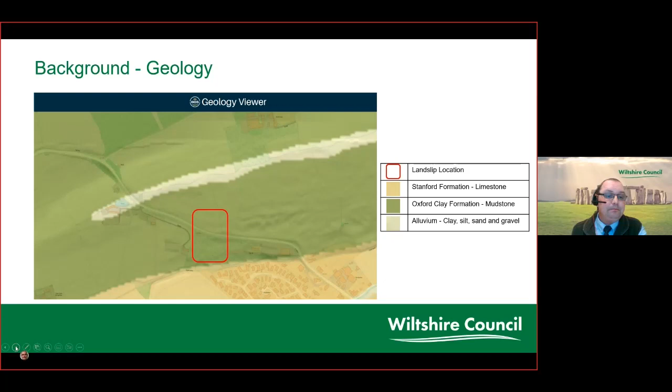An image just to show the current situation. This is the B road coming from Dauntsey Lock to the left down to Lyneham to the right, and just so people can orientate themselves, this is the Motorholics site. The landslide itself is within, or approximately within, this red circular area, about 100 metres in diameter, so that is a significant area.

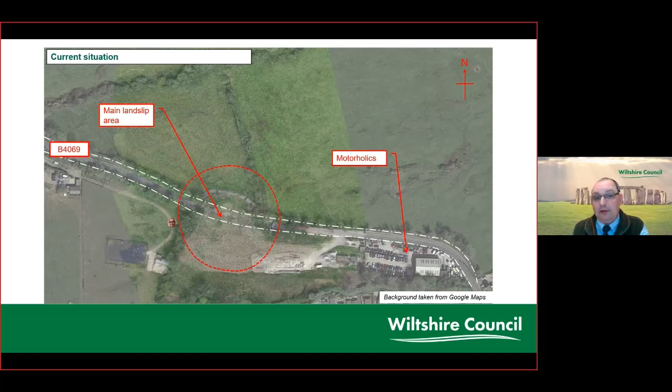The block of land, or the landslide material that's moved, we believe is between 2 and 4 metres deep, so it's a significant amount of material that has come down the hillside. The white dotted lines on this image are important because they indicate the highway boundary. That means the area of land between the white dotted lines is the area that Wiltshire, as highway authority, controls and has access to. But the landslide clearly is not contained wholly within the highway — it covers significant parts of privately owned land either side.

I mentioned earlier that there is recent evidence that the land is still mobile in that area. In January of this year, we were alerted to a totally separate incident at the rear of the Motorholics site, where you can see part of the hillside has been displaced — about 0.5 metre or so drop in elevation. Although this is totally unrelated to the main landslide event from February last year, it does indicate that the area is very susceptible to land movements.

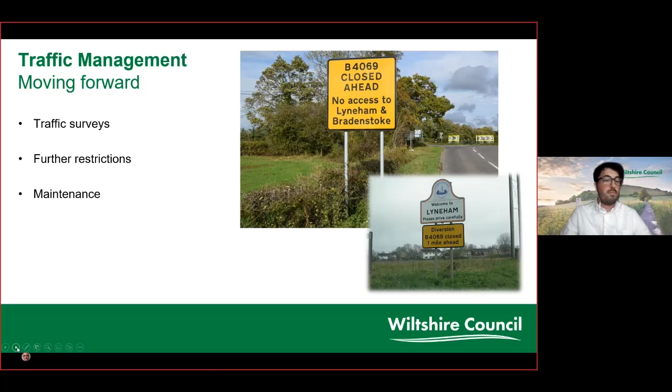Thank you, Jack. I think that was quite helpful, and the big take for me there is that we haven't simply just put some signage up and then walked away from the situation. We've actually been reacting and changing the situation as best we can as the time has passed. So yeah, a lot of activity and a lot of work behind the scenes in terms of our traffic management arrangements for the scheme.

I think we're now going to come on, Chris, to the ground investigations. You've got a few slides which talk about the ground investigations we were able to do towards the latter part of last year.

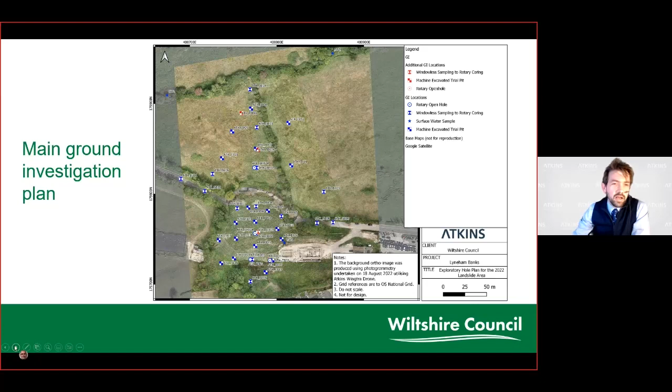Also during the closure of the road, the opportunity was taken to install ground investigation and monitoring equipment in the area to the west of the landslip, where there's been historical cracking and pavement issues patch-repaired in places. This was done so that following the reopening of the road, Wiltshire can monitor these areas more closely.

In addition, to the east of the landslip, recently there's been water discharging onto the carriageway. There have been investigations looking at the potential source of that water, and these will allow the design of remedial solutions to fix this problem along with the landslip.

This next slide is an observational ground model, developed on the basis of the ground investigation information and everything obtained during the desk study. There are a number of key features to draw out from this. This is a slice through the ground, taken through the centre of the main landslip.

On the left-hand side, orientated to the south of the site, you can see the limestone at the top of the slope, as discussed earlier when we looked at the geology of the area. That limestone overlies the Oxford clay, shown in green, and the slope itself is overlain by weathered Oxford clay, where material has been subject to historical weathering. Above the weathered Oxford clay we have a mixture of fill and solifluction deposits.

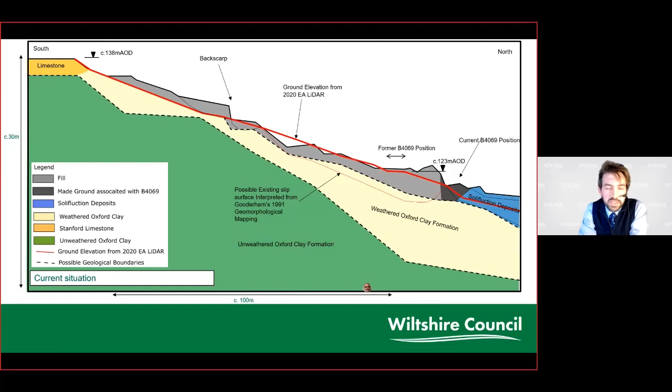The final thing to highlight on this slide is the small dashed red line, indicating an existing slip surface inferred from historical geomorphological mapping. This area and its geology is particularly prone to landslides, and mapping dated from 1991, done as a study for Wiltshire at that time, indicated potential evidence of geomorphological features suggesting a historical landslide. There's also evidence within the topography and contours that the landslide area was previously in a local depression, which again might indicate historical landslide activity.

So obviously it's absolutely critical in order to fix this problem and to reopen the road that we understand the key factors affecting the landslide. To provide a suitable remediation solution, it's critical that it addresses all the underlying causes.

A couple of points to draw out on that. The geology of the site is prone to landslides and ground movements. We've got shallow groundwater migrating from high areas to low areas, which can exacerbate issues. There's historical ground movement, both in recent history and longer term, going back to the glacial periods. Weather is very important too - increased and excessive rainfall, particularly during the wetter months, can accelerate ground movements and lead to instability. Finally, changes in topography or loading on the hill slope can significantly impact slope stability.

On the basis of all of this, it's clear there's potential that some of these aspects triggered the landslip in 2022. The location of the landslip in areas of historical slip surfaces, potential local changes in groundwater, as well as changes to the loading on the slope and the addition of fill, is likely to have contributed to the triggering of this landslide.

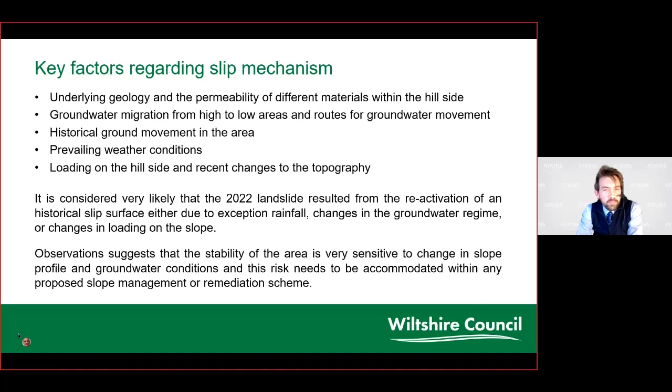Thank you, Chris. I think that's very helpful. And for me, the wording in that final paragraph on the slide is crucial. The ground investigation works that have been undertaken have drawn us to the conclusion that we have a very sensitive area here with regards to the stability of the hillside.

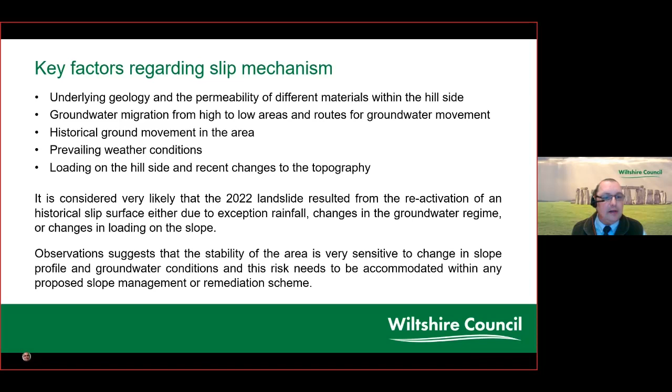Fundamentally, if we were to try and come up with a solution that just involved going in and building a road, without being mindful of and trying to provide additional stability to the hillside, we wouldn't actually be solving the fundamental problem. The ground investigation works have given us a lot of data and information, which has fed into our ability to start thinking about what the solutions for the site might be.

That brings us on to the next section of our presentation, which is all about developing those thoughts for what a scheme may look like.

But what we must do is ensure that whatever we choose for zone B, as an example for the road, is compatible with and works alongside the solution we put in for zone A and zone C. If we don't get all the areas working together as pieces of a jigsaw, we could end up with a situation where the overall solution isn't actually achieved.

Not only have we got three different zones on the slip itself, as Chris was alluding to earlier, we also see some signs of carriageway problems to the west and to the east of this site. So we've actually got five different areas we need to think about, and in determining a solution, we need to develop a comprehensive solution, which by its very nature will end up being quite complex.

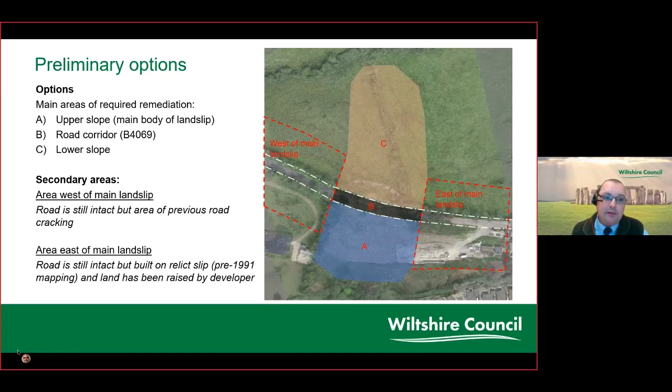So, Chris, I think you're going to now move on to talk about the options development work we've been undertaking, specifically thinking about the core works that have to happen regardless, and then the potential options beyond that. Yeah, thanks, Steve.

As Steve mentioned, we've been working closely with Wiltshire over the last few months. Sorry, do you mind just going back one slide? Basically, with a completely blank slate at the start, looking at remedial solutions, and then gradually over a period we've narrowed that down. What we've developed is effectively a two-phased approach - there are what we're terming core works, which would underpin all of the different options we've considered, so common elements.

Going back to the failure mechanisms of the landslip itself, obviously all the remedial works are targeted at trying to address some of the potential underlying causes. Firstly, changes to the slope topography - post 2021, material has been deposited on the upper slope.

So we have this core earthworks which would seek to remove that material and re-establish elevation of the slope back to its pre-2021 levels. That would underpin all the remedial options you'll see on the slides ahead. In addition to the core earthworks, there are core drainage works.

Groundwater is absolutely critical in driving slope instability, so controlling it is critical to reduce the risk of future landslides and slope instability. What you see on this slide is some extensive drainage proposals to manage groundwater throughout the upper slope.

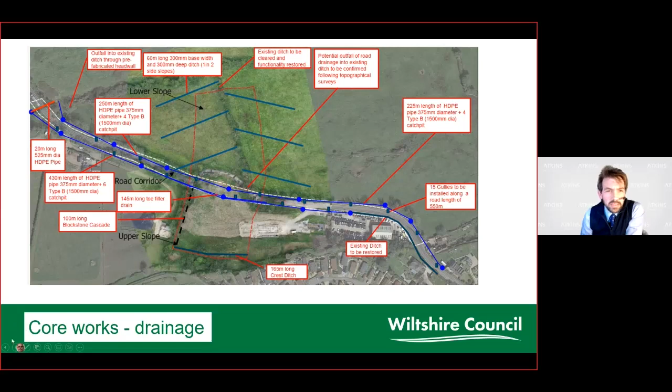As I said, those core works underpin all three of the options that we've looked at and assessed. We've developed a number of options which we can then undertake an assessment process on, which Steve will come on to later. They've been developed in enough detail to understand the relative advantages and disadvantages of each scheme, so there's both a plan and a section for each of the three options. I won't go into a huge amount of detail, but just to give a flavour of the three we've looked at as part of our options assessment process. In the top right hand corner you'll see the estimated construction costs for each option.

Option one was excavate and replace. Very simply speaking, this is a case of excavating the failed landslip material, removing it from site, and then importing engineered fill, compacting that in layers to establish a suitable platform on which to rebuild the road. That includes additional drainage measures to control any water that would find its way into this area.

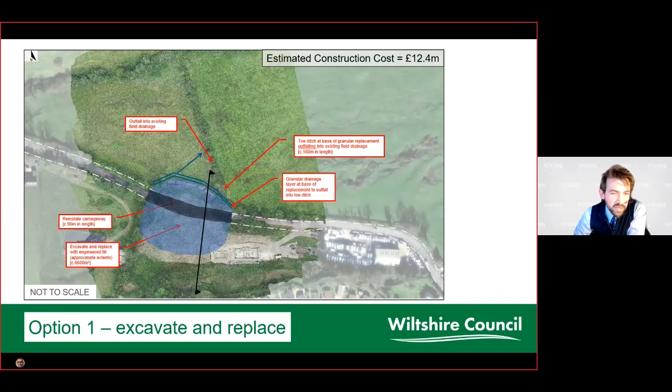You can see that the road itself forms a very small part of the overall remediation required, and given the position of the road, you can see how extensive the required remediation solution is, both in the area upslope of the road and also downslope, which is currently private land and outside of Wiltshire's direct control. Next slide, please.

So the second option we've looked at is a soil stabilisation option. This has some additional drainage in the upper slope to try again to provide further controls on groundwater above the landslipped area, and then the main remediation part of this solution is mixing in a cement binder into the material on site as it is at the moment. That cement binder strengthens and improves the properties of the ground that's currently on site.

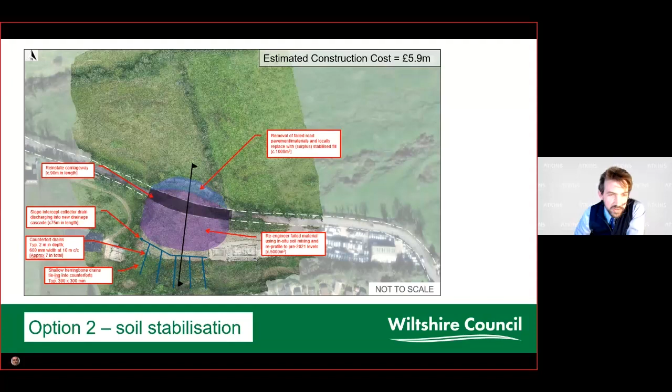And then obviously some additional works associated with that as well. The final option is a piled retaining wall solution. This involves installing a contiguous bored pile retaining wall on the downslope side of the carriageway, which stabilizes both the road and the slope itself.

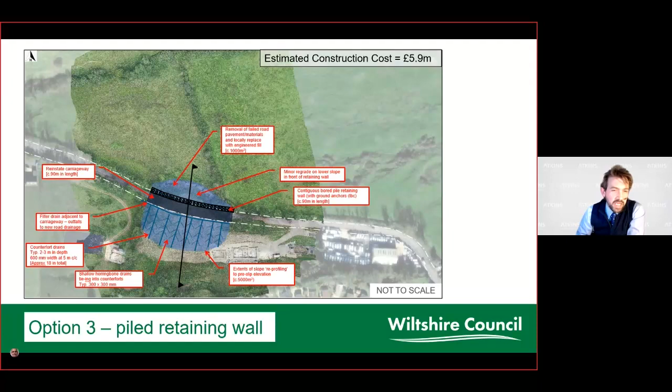In conjunction with that, some counterfort drains are proposed in the slope directly above the road. These counterforts serve two functions: they improve drainage in the slope itself, as well as improving the strength of the ground. Effectively, it's a dig and replace, but on a more localized scale - basically gravel drains excavated into the slope, keying into the material below the existing shear surface.

So if you could bring up the next slide. Again, you can see this involves a substantial amount of work. The bored pile retaining wall is potentially sort of 10-15 metres deep, and may require anchoring through the use of ground anchors to provide additional lateral restraint. That stabilizes the slip by providing additional lateral restraint to the slope, and then you've got the counterforts that help serve that purpose as well.

So that's just a very brief summary, and you might have spotted that options 2 and 3 came up with a capital cost of around £6 million construction cost to complete, compared to the construction cost to complete for the excavate and replace option of over £12 million.

Thank you, Chris, that's useful. I think on all of these cross sections, the one thing that jumps out at me is how relatively small the road element of these works are, and indeed how much access we're going to need to the adjacent landowners' areas. We are actually going to need to purchase some land to bring forward some of these solutions, so there is going to need to be some land take to allow us to deliver these solutions.

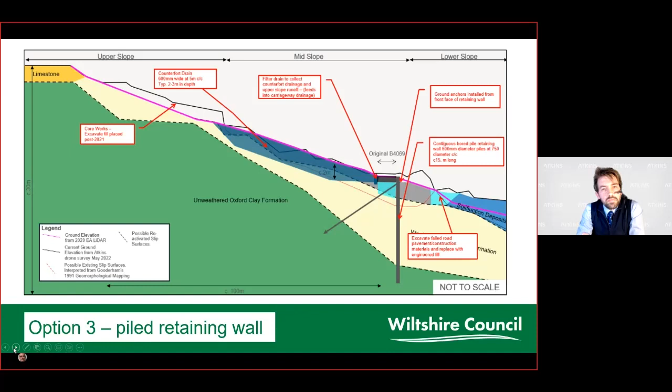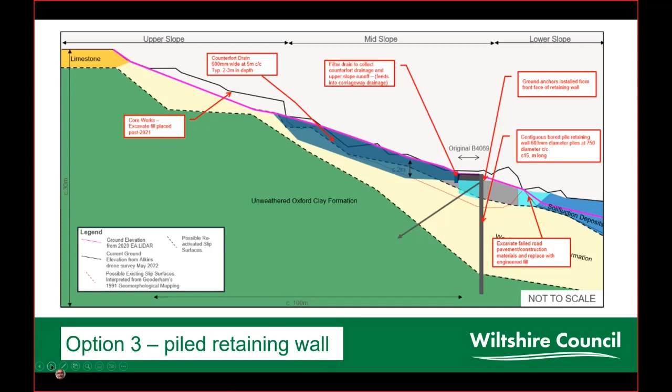Having thought about what the possible options are, we then need to move on to actually what's the best solution overall, and what we would like to move forward with. I'm just struggling to bring up the next slide - bear with me a second. I do apologise, there we go.

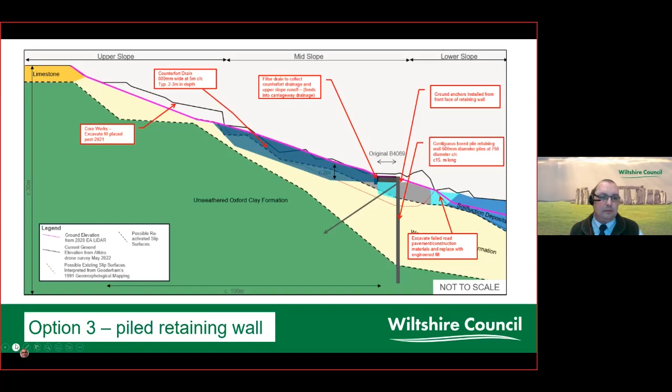So in order for us to think about which particular option would be the best, we need to think about various assessment criteria. We've had a couple of workshops between Wiltshire Council officers and Atkins, and we've thought about what the assessment criteria would be and how these individual options fare, what the relative pros or cons of each option are, and what the benefits and perhaps disbenefits are.

These are the criteria that we've assessed against. Obviously, how we build it and the buildability of the scheme is an important factor. The upfront capital cost, but also, very importantly, the ongoing maintenance liability and therefore the whole life costs associated with these particular solutions. We've mentioned health and safety on several occasions already - clearly we need to be able to build these solutions, and build them safely. Some of these are going to involve quite significant temporary works in terms of piling rafts and platforms.

The environment and carbon issues - we've mentioned some contaminated material. The excavate and replace option in particular would involve the movement of a huge amount of material off-site, disposal in landfill, and then the import of engineering type materials. So in terms of environmental impacts and the carbon impacts, that particular solution is not particularly favourable. We need to think about the programme and how long these solutions may take to come forward, and again, as I've mentioned a couple of times already, the land requirements, the land agreements that we are going to need with the adjacent landowners are a key factor as to which is our desired solution.

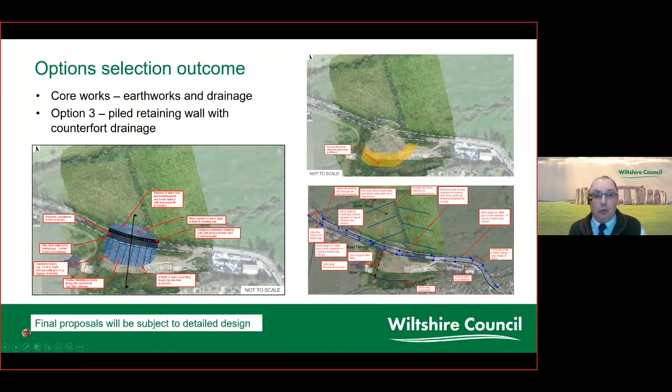And then in terms of the building of the road, we are favouring that retained piled retaining wall solution, which involves 15-metre deep piles, which effectively support the new road on the hillside. Obviously, the exact details of this solution will need to be designed up, and you'll see the comment at the bottom that the final proposals will be subject to detailed design.

So that's where we've got to thus far. We've done the ground investigations. We've thought about what's happened, why it's happened, what the factors are, what we need to think about in terms of a design solution, and we've developed our solutions. So how do we now go forward, and what are the next steps?

To move forward, we think that we've got a design effort. It's a very complex scheme, so it's going to be quite an intense and difficult design process, but we believe that we can take that design forward through the next 2 quarters, Q2 2023 through to Q4 2023. But there's no good us coming up with a design if we can't actually implement it. So in parallel with that design effort, we need to progress the development of the funding stream for these works, and indeed the legal and land access agreements that will need to be put in place to allow the scheme to come forward. There's some fairly critical work that needs to happen alongside the design efforts for us to develop a scheme we can come forward with.